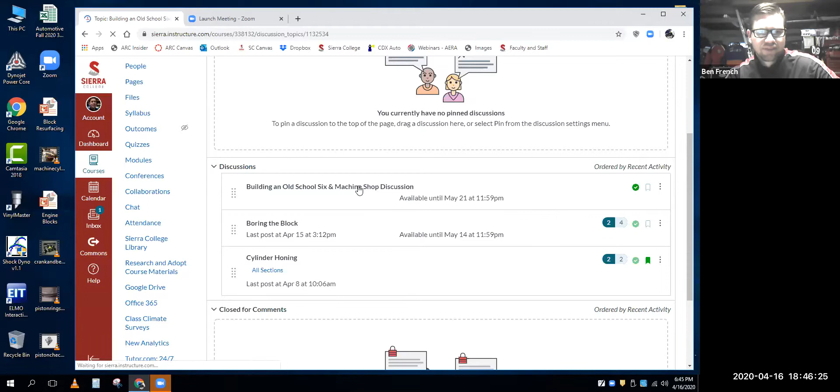Alright, so I'm at our Canvas page, and what's new is I've added a discussion here on building an old school six engine.

Engine power. So there's two pretty decent engine shows. There's Engine Masters, however most of those episodes you need Motor Trend on demand for. Engine Power is okay, there's a little bit more sales-pitchy stuff going on there, but I cherry-picked this one because it's a nice view of the machine shop that the hosts used to work at, and they do some good assembly and some good machine work.

So I put together a little discussion related to this episode. There's definitely some nuggets of information we can pick out there. So that is new on our Canvas site.

Also, if we go to the modules, let's see, here it is. I've added some information there, again links to that discussion. I also have bearing catalogs for regular automotive and for performance, and we have some other things related to piston rings.

And we'll do another series of discussions on episodes related to building an in-house power mouse, which is a small block Chevy often called a mouse motor, because when the big block Chevy came out they decided to call that the rat motor, so the small block became a mouse. Anyways, it goes through pretty good assembly, so it's a good video to look at for engine reassembly, and it's fun to see what they're tuning on their dyno.

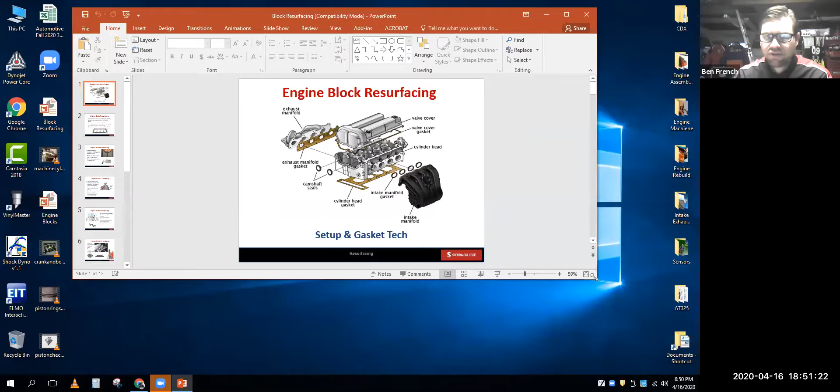So with that, what I'm going to do is minimize this and open up this presentation on resurfacing, and we'll go through this real quick. Surfacing is one where I don't have a real detailed video on it, just some quick videos. They resurfaced the engine block on that engine power show, but it's pretty quick. So I put this presentation together to get into the nitty-gritty related to using the surfacer. I know you guys have used that surfacer when you did your cylinder heads, but I wanted to cover some bases with it as well. So let's jump into this thing.

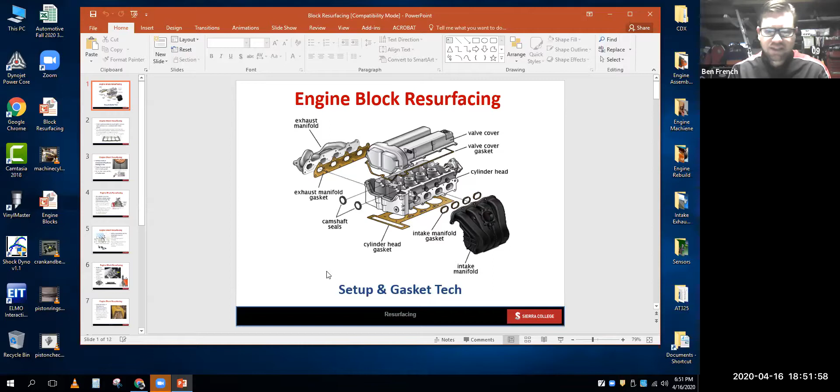Today's engine blocks are running a lot of different metals. We're using thin wall castings, whether cast iron, aluminum, or aluminum and cast iron. Those have different expansion rates. So it's a tough job that the head gasket has to do to get these things, to get the head and block to seal up and act as one unit.

With that, the new standard in gasket design is what they call MLS gaskets, or multi-layered steel gaskets, and we'll get into some of the details of those. Obviously, the gasket surface can't have a lot of warpage. The normal rule is you can withstand up to about 1 thousandth per cylinder bore, but you don't want more than 1.5 thousandths in any one spot. That means at max, if you had a gentle slope going across the bore, you could have 4 thousandths total, but you wouldn't want too much in any one spot.

In addition, the surface needs to be smooth enough to provide some movement related to thermal expansion, but it also has to provide enough bite for gasket retention. So it's got a tough job there. If it's too rough, the head gasket's going to fail, and they like to fail between cylinders, between coolant passages, sometimes between oil passages, and can cause us all kinds of grief.

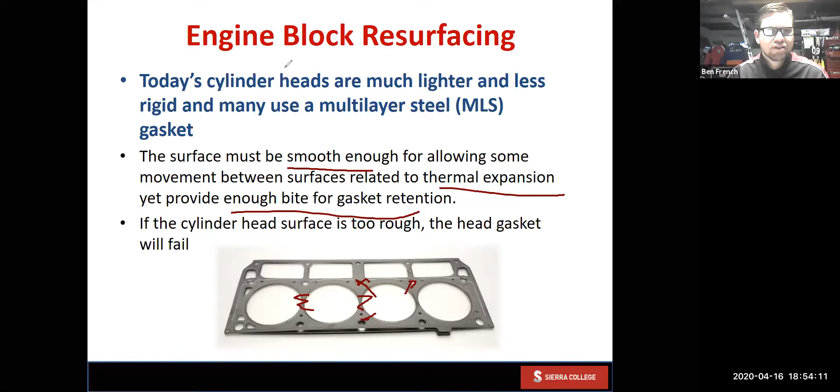So let's keep going here. Clear those out.

So our surface finish on our cylinder blocks and heads, oftentimes you'll hear a gasket manufacturer speaking about RA, or roughness average. We actually talked about that a little bit when discussing cylinder surface finishes. In this slide, we have a 30 RA, or roughness average, and a 60 roughness average. Of course, the proper RA gives you the right surface, the right compromise between bite and smoothness. Now, we looked at this a couple weeks ago as well.

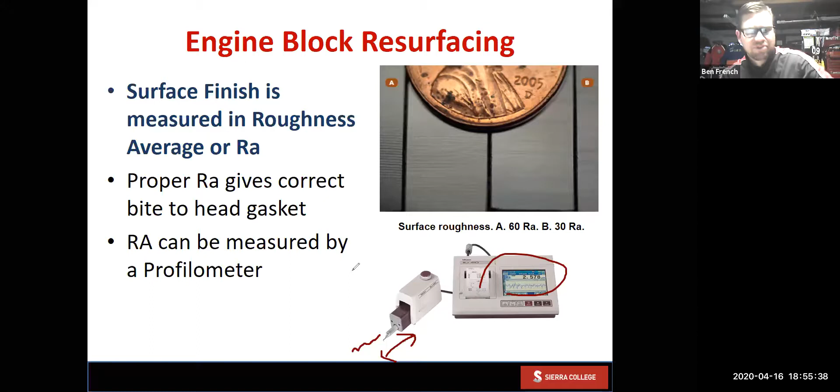This is a profilometer, a nice top-line Mitutoyo model. That guy is around $7,000 to $8,000. It has a little stylus that moves back and forth across the surface, feels what the surface value is, and gives you this readout to let you know what your roughness average is. In high-end shops those are getting more and more popular. They sell a low-end model somewhere around $2,000 to $3,000. Yeah, that's the screaming deal, right?

Okay, so we know the engine block should be fixed in our surface machine, and most surface machines are going to try to index that block off the main bearings, and we want to try to make everything nice and level and parallel as much as we can. If the machine is set up right and the main bearings are straight, this should make the deck surface parallel to the main surface. So most of the time, you're going to want to take care of the mains first and make sure those are straight before you use the boring bar, or in this case, before you use the resurfacer, because we are indexing the deck surface off of the mains.

Like it says here, if any surfaces aren't perfectly flat, we're going to have failure. Oftentimes where I see people have repeated head gasket failures is just improper assembly. They don't get stuff surfaced like it should be, and they end up with surfaces that aren't flat, or they don't follow the torque sequences, or they don't replace their fasteners like they should, or they don't do the right procedure, and then they wonder why it fails again.

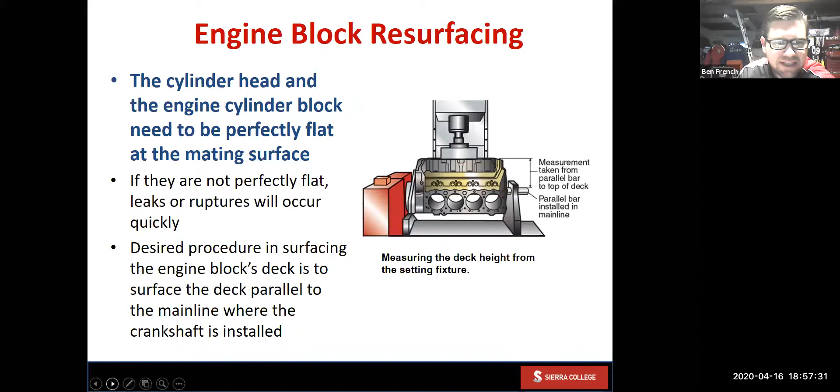So it's one of those things where even in production engines today, even if you haven't increased the power substantially, everything is pushed pretty far to the edge of its normal capacity. So even in a stock application, following those procedures is really critical.

If we were throwing a block on the resurfacer, one of the things we need to remember to do is take the dowel pins out. It seems like that would be common sense, but I've had lots of people forget to pull these dowel pins.

And then it chunks into the machine and creates all kinds of havoc. Now, ones like this one come out pretty easily with pliers, but the smaller ones, you often have to use a dowel pin removal tool to get those things out of there, and they can be a real pain.

Now, if it's an open deck, meaning these holes are not blind, like this, you can look at this hole here, and that goes down into the water jacket passage, right? So imagine it didn't have this type of a dowel, but it had one of the small dowels that was pressed in here. And if I couldn't get it out, and this tool kept slipping off, I could just use a punch and hammer it through and then pick it out with a magnet out of one of the water jacket passages.

So that's an option that I see people fight with this tool and forget that, hey, if it's an open surface, I can hammer it through there.

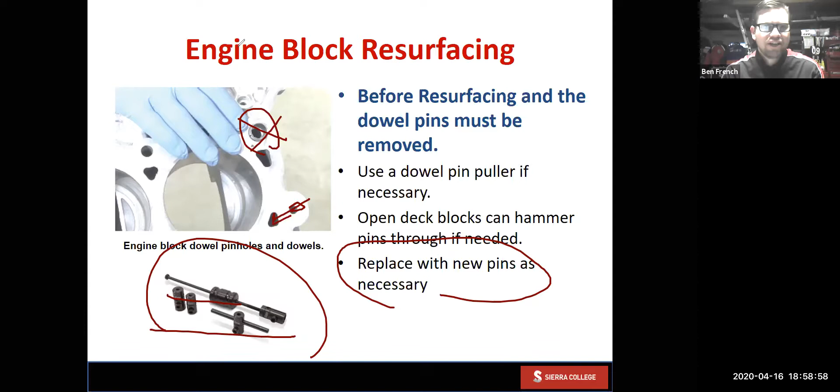Obviously, you want to replace these pins, these dowels, whenever possible. Even with this style up here, oftentimes you'll end up knurling them up pretty bad pulling them out, even with some pliers, and you'll want to end up replacing those.

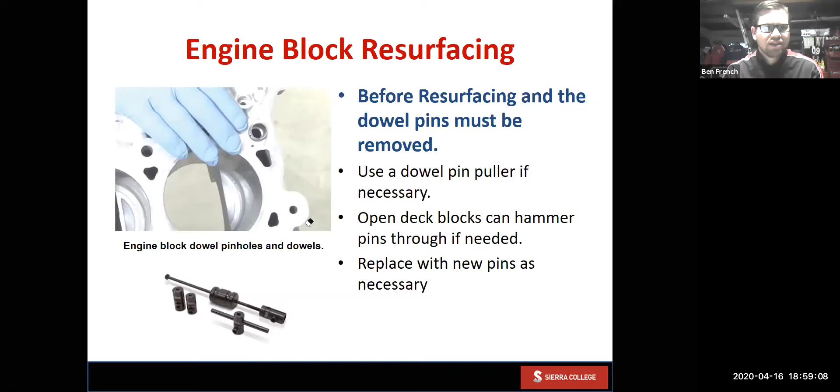All right, moving right along. So then your next step is to get that cylinder head or that engine block all squared up and level to the cutter as much as you can. And if it's not going to be level, you need to make sure that it's not level because it's not square to the mains, or that you haven't just set up the machining correctly.

At Sierra College, we often use machinist levels. Of course, those work a heck of a lot better if the surfacer itself is level, but you can compensate if the surfacer is off by a little bit. You just want to make sure that the head surface here matches this surface there, right?

Now, the nice thing about these surfacers that index off the mains is that it allows you to rotate the engine block from side to side and cut both deck surfaces the same height, so that this block deck height is the same on both sides. And that's critical, right? Because if this side was cut lower than the other side, I would have higher compression on this side of the engine than I would have on that side. So if you use the machine correctly, you should end up with the same deck height on both sides.

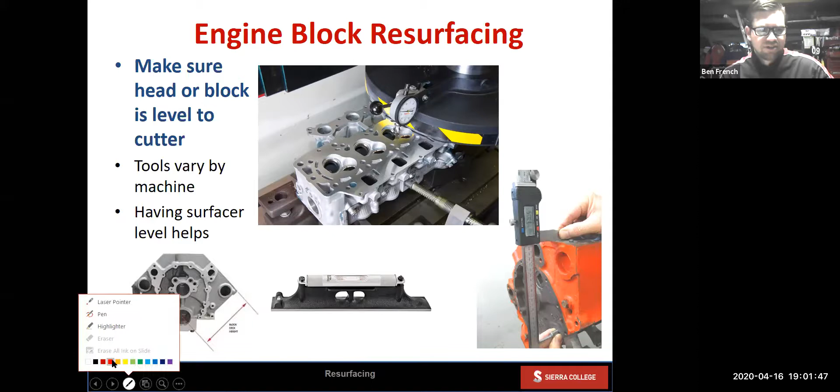All right, different styles of machines. At Sierra College, we have both wet grinder styles, and we also have cutters. The nice thing about a grinding style machine is they work well for aluminum or cast iron. They do tend to make a little bit more of a mess, but in years past, if you were going to handle aluminum, that's what you had to use.

Slower material removal. And of course, as I'm cutting this surface off, I experience stone wear, and these stones are not cheap. Those stones can be anywhere from $500 to maybe $1,000. So they're definitely not cheap.

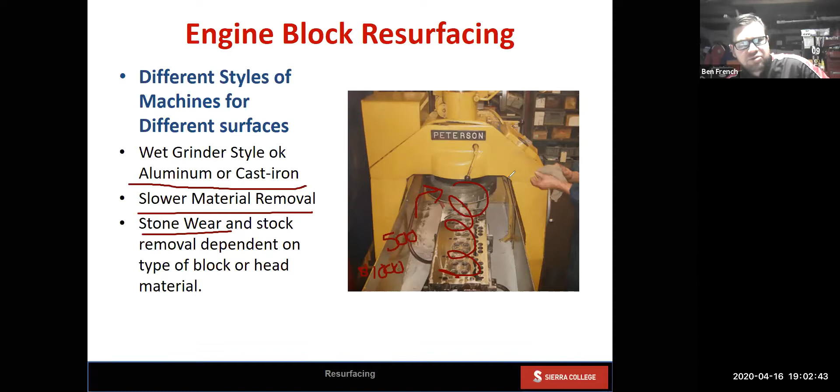And then as they wear down, they don't wear too much with aluminum, but for cast iron, if I moved the machine down 2 thousandths, it would really only probably take 1 thousandths off of that head or that block, because I have the same amount of stone wear occurring, right? So stone material is sloughing off the cutting stone as I am working my heads.

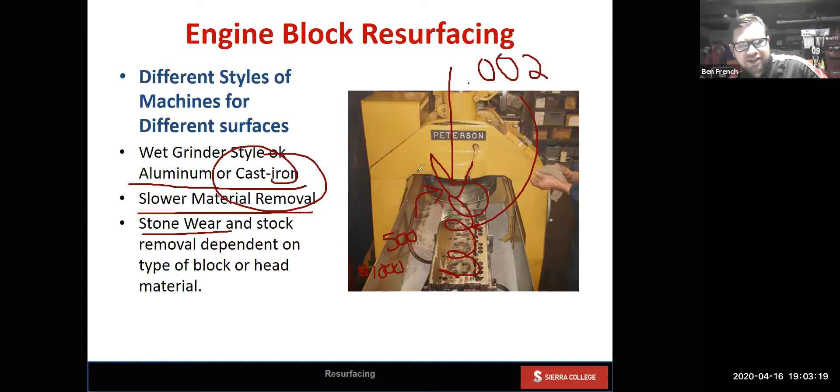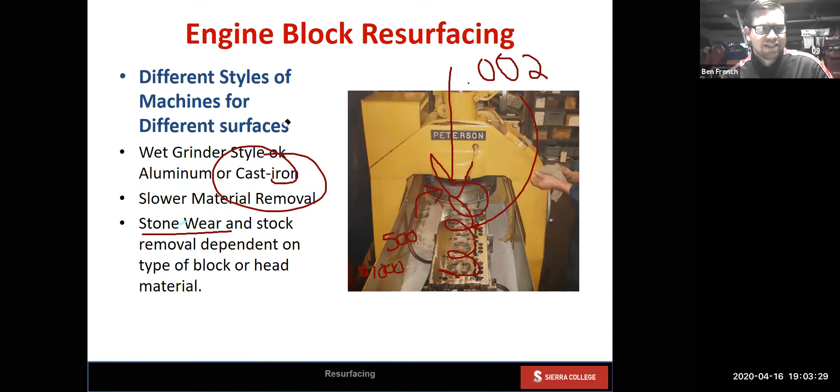And then of course, anytime I dress the stone, I'm taking material away. If I'm doing just a bunch of aluminum, I do need to dress the stone to keep it clean periodically. If you do a mix of aluminum and cast iron, usually doing a cast iron block or head will dress up the stone good enough that in between aluminums, you end up not having to dress the stone so often.

But they don't take as much material away. They tend to make a bigger mess, and you have to pay attention to what you're actually removing, because you are going to have some stone wear. So if your feed says you've taken off, let's say, 10 thousandths, well you probably haven't really taken off 10 thousandths. So you'd want to set up a dial indicator or some type of depth gauge on a spot in your combustion chamber to check your work, to really see what you were doing if you were doing a high-end build.

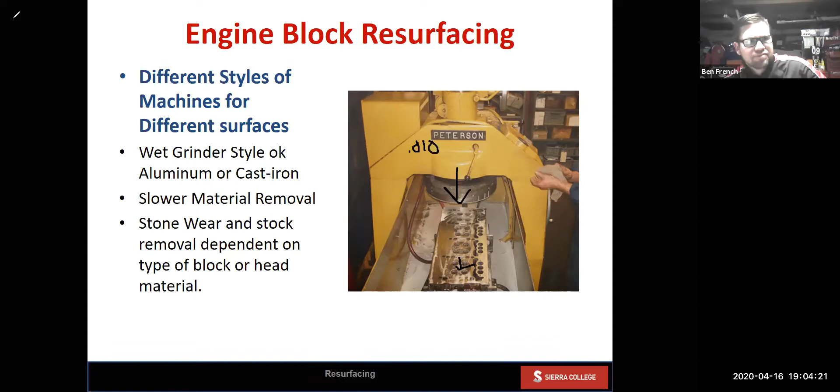All right, so our other style of machines would be the dry cutting machine, right? And of course, we have our old Storm Vulcan in the shop. And of course, the older machines, the cutting bits on them were really only set up to deal with cast iron. The speed that the machine was set to, its feed rate, and these bits were really set up to cut cast iron and could not handle aluminum.

However, the new machines have different carbide cutters on them. They can operate at variable speeds, both for the speed of the cutting head and the speed that it sweeps across the block. And because of that, these machines, a lot of them are computer controlled, and they're becoming kind of the industry standard. They give you more flexibility as far as setting things up, and can cut faster. They can definitely cut faster than a grinding wet machine, and they make less mess, but they are pretty darn expensive. So anyways, that's kind of the new standard.

Our old dry cutting machine works great for cast iron, wouldn't work good for aluminum. So Phil, like your Subaru engine, if you needed to do surface work on that, we would have to use the other machine.

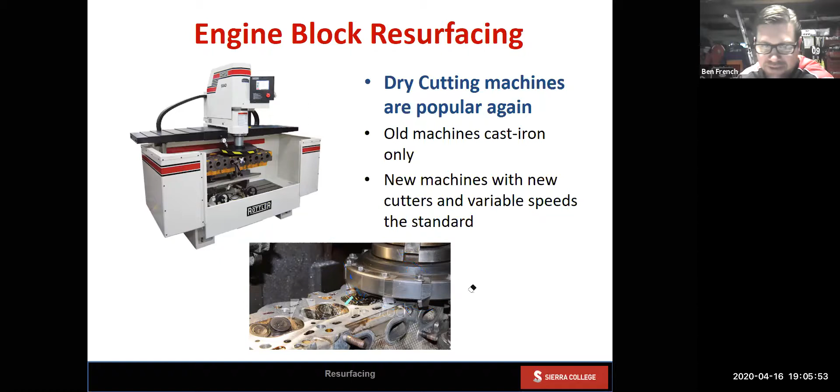Mm-hmm. Yep. All right, so now we're gonna finish this thing up with a little bit of gasket tech.

So, I'm a big proponent of, hey, if you get something, any parts you get, and if they come in a box with a little thing of instructions, read the instructions, right? They'll give you some good tips on how to set that thing up. All the time in my career as a mechanic, something would happen and they'd go, well how'd you know how to do that? And I'd say, well, I read the instructions in the box. Okay, so maybe you do that when people aren't looking so they don't give you a hard time, but you can learn a lot by reading the darn instructions. So they'll say, hey, don't use these sealers on there.

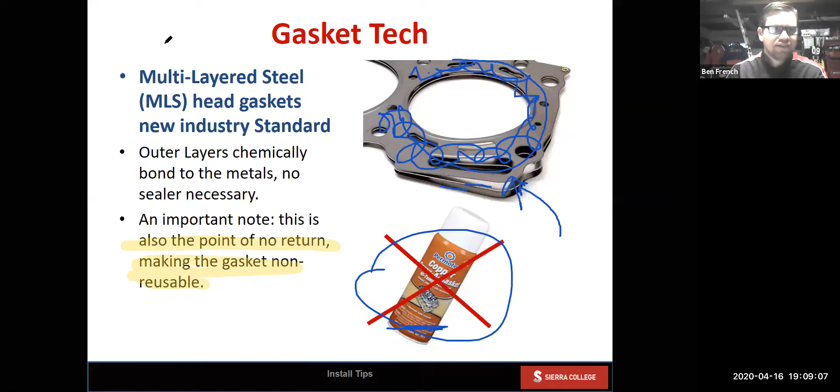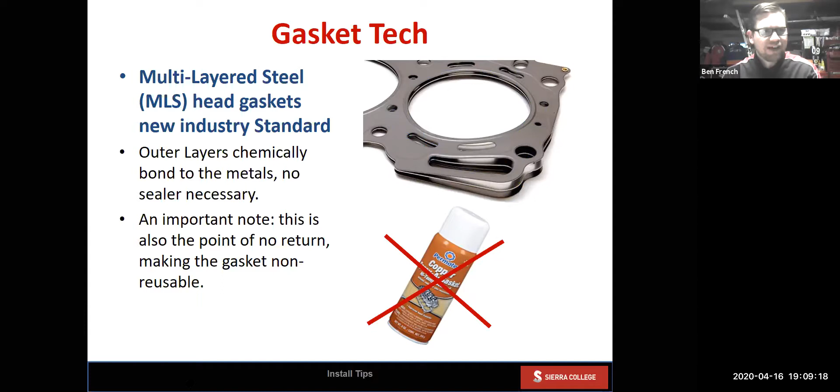So, couple of things. I've seen both of those mistakes happen from multiple people, and I've had students trying to reuse these gaskets. Like I said, it might work for a while, but it's not really made to work permanently like that. Again, the surface finish is really important.

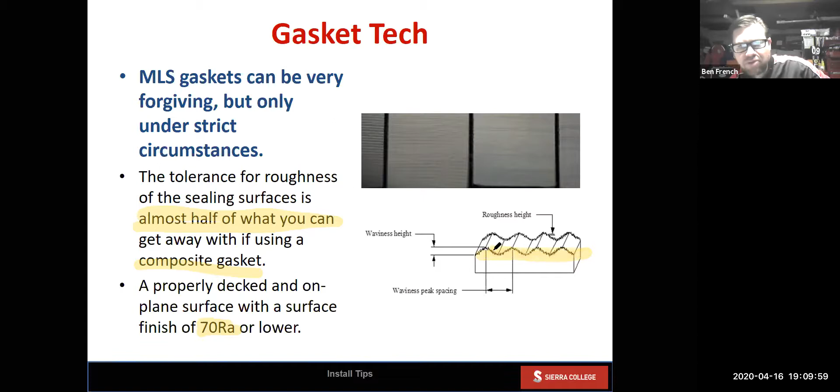What are we talking about? Well, typically these guys want a much smoother surface finish. So what we're saying is pretty much about half of what you could get away with a conventional composite, like a good quality Permatorque composite gasket. So what does that mean? 70 or lower, and some might be 30 or 40, but 70 or lower gets you in the right roughness average ballpark. So this one's just barely in the ballpark. This one's definitely the smoothness here that we would want for our MLS gaskets.

So they want a smoother surface. They do tend to be able to withstand a little bit more warpage though. Like if the surface isn't quite as flat, it seems like you can get away with that as long as the surface is nice and smooth.

So this tends to be one where if you're doing a head gasket job in the field and you can't take it to the machine shop, it's close but it's not perfect. Maybe you're right on the edge where you've got that 1.5 thousandths of surface imperfection, a little bit of a dip in the surface or something. If you can go over this with some fine sandpaper with the deck surface sprayed down with some WD-40, so you're kind of doing a wet sand and can get a real smooth surface, this type of gasket will work good in that type of situation.

Again, proper torque sequence, all that other stuff comes into play, but they tend to be a little bit more forgiving than a solid gasket because it has those multiple layers.

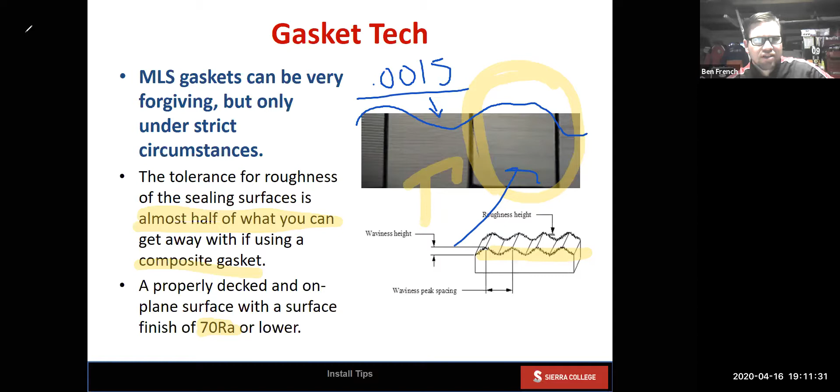All right, thickness. You can get these in all kinds of thicknesses, and they seal pretty well. In fact, they're generally available in a wider thickness range than what you had available to you with conventional gaskets. So here we have 27 to 140, that's a figure from Cometic gaskets. Others are real similar. That being said, you could go to something thicker and take yourself down a notch on compression for your compression ratio. But if you're having to do big swings, you probably need to make other changes, right? Like maybe put in a dish piston or something like that. So pretty good range on these.

And other notes related to that would be, if you're changing the head gasket thickness, push rod length becomes a big deal. Of course, if it's a V-type engine, is the intake manifold going to line up properly as it sits down in that valley? So those are things to think about.

Lastly, you can't stress enough that, hey, good quality fasteners is a big deal, right? The combustion process is trying to blow the cylinder head right off the deck surface of the block.

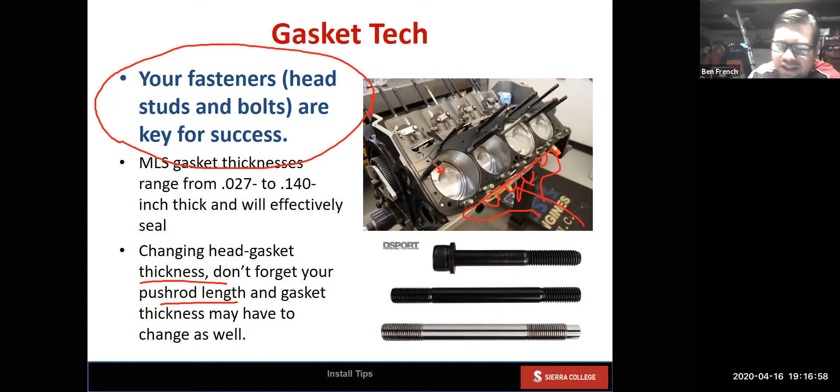Speaking about things not lining up, if you ever have an issue like that - like the other day I was trying to put some exhaust manifolds on an engine, I'm drawing an exhaust manifold here - and stuff's not lining up, you've got to stop and ask yourself why. A lot of times you might pull something apart and it came apart just fine, but when you relieve the tension, that component was warped, and now you're putting it back on warped. So check for straightness, not only on cylinder heads and deck surfaces, but things like your intake manifold and exhaust manifold especially, because those like to warp and then parts won't go together correctly.

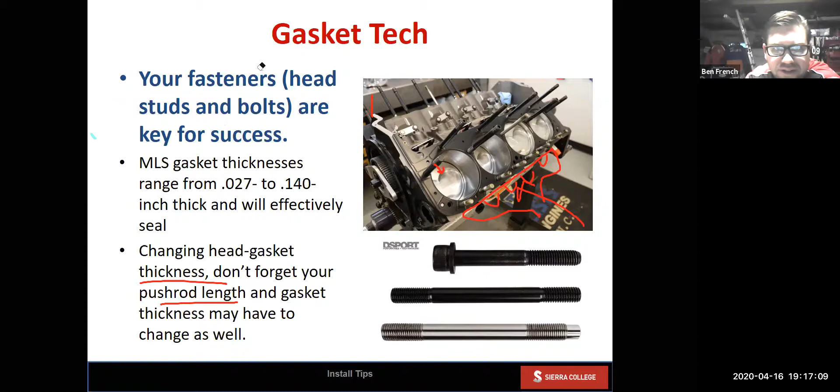Just keep in mind that having stuff level, having stuff straight, is the key to proper assembly there. So with that, we finished up our gasket tips and tricks.

Phil, do you have any questions or concerns? Brian, do you guys have any questions? I don't know, no. All right, well, pretty straightforward. Yeah, it's a pretty straightforward deal. What I find is just a lot of folks don't take the time to make sure they have quality fasteners or that stuff is straight or things like that.

Speaking of fasteners, I don't know if I've done my thread wedge analogy with you guys, but I think I will share that with you.

Let's see if I can make... let's see, give me a second here... whiteboard... and I want to make video. Let's see. Optimize screen for sharing video clip. All right. So now you can see me a little bit bigger here. I'll do my... actually, I'm losing it, guys. I can just use my document camera. I got too much technology here, it's throwing me off. Document camera, there we go.

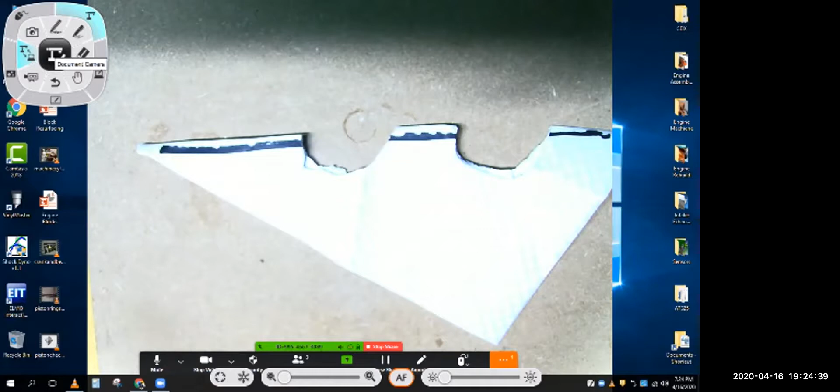Now we'll do this real quick, just because I feel, here was my thread wedge, okay, yeah, that didn't work out. So you can see I ripped it up there, but if I roll this sucker back up, you can see where it starts to form some threads. Of course, now they're going to look a little bit uglier, but here we go, right? So you get the idea. So threads actually wedge parts together, and that's what gives you the clamping force.

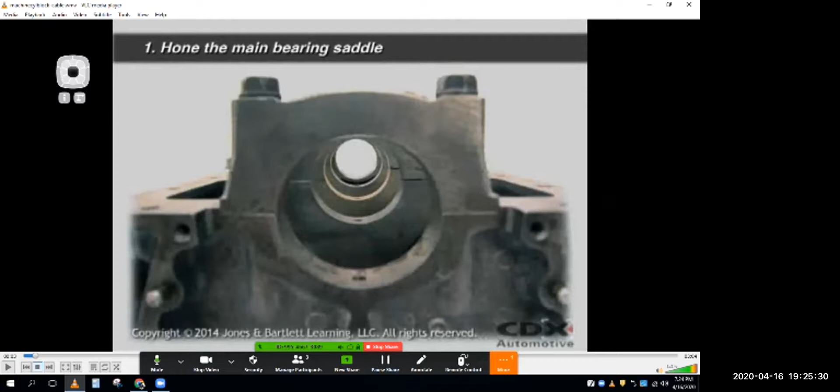All right, okay, so we got that. So now I will turn it back to the computer. So you should see my computer screen, correct? Yep. And we'll see if we can get it back on the video. The main caps need to be removed first. There we go, yeah, they're starting with the line honing operation. So we'll get to that part. All right, here we go.

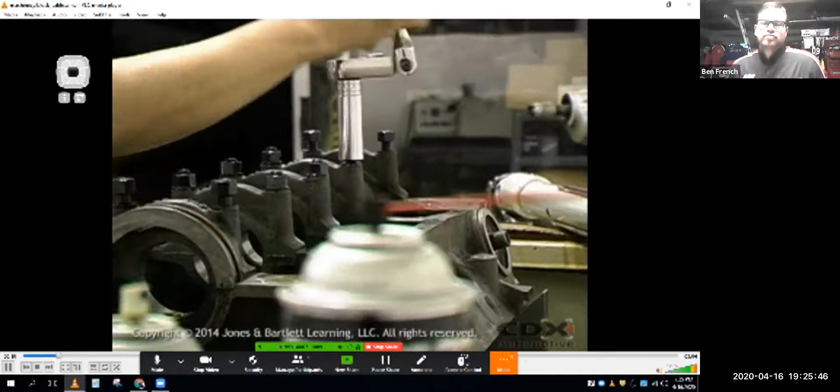The whole thing is only 3 minutes long, so they rip through it pretty fast. Caps are put back on the block and tightened and torqued to spec. Now the opening is no longer circular, it's a slight oval. The size is checked with a dial bore gauge, and the honing stones are inserted and expanded until the proper drag is felt.

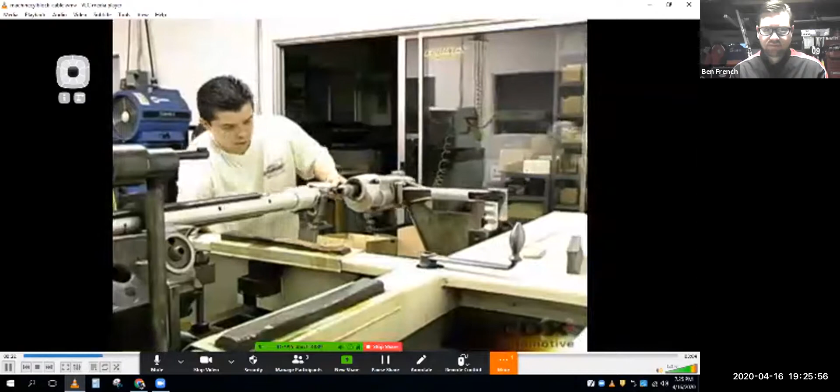The honing drill is lined up with the stones, and once the oil starts to flow through the tube above the block, the stones are passed in and out while the drill is running, so that metal is removed and the oval shape begins to return to a perfect circle.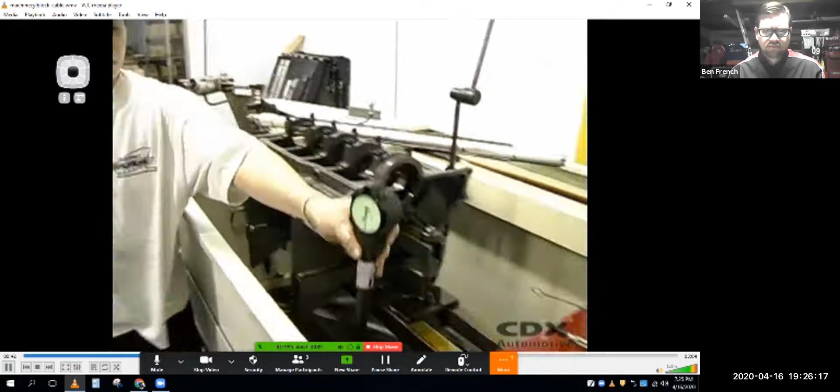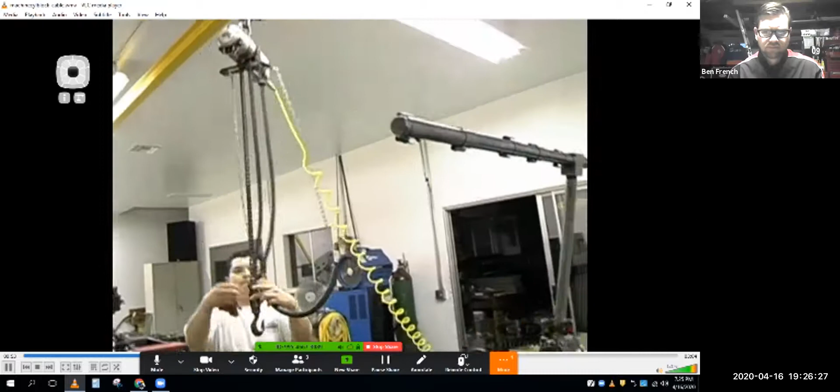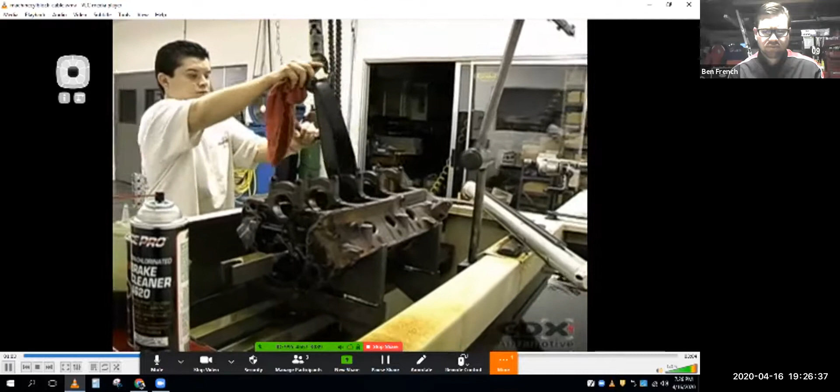As the stones take off metal, the block and caps begin to heat up, and the machinist checks the size with a gauge and takes a break to let the block sit and cool so the metal will return to its true size. After a few minutes of cooling, the stones are run again and progress is checked with a gauge. Then the block is lifted and turned around so the hone can be finalized to the perfect size from the other side. This is the first process for the block because the next two machining procedures depend on a perfectly straight line through the main bearing bore for proper mounting to the machine.

So I guess I'll pause it right there. One thing about this video is that you can tell the producers didn't really know about machine work, so their script is a little bit generic.

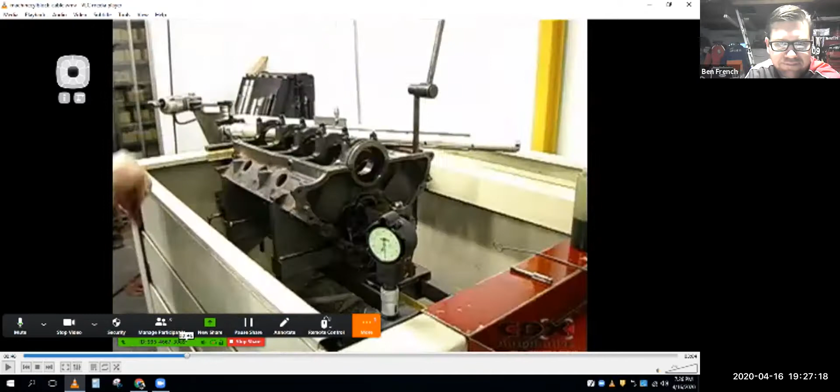Every machinist has a little bit of style to what they do, right? So this guy, for whatever reason, liked to spin the block around. I don't know if you necessarily need to do that, but we do know that when you're line honing...

It always cuts more from the end that's closest to the drill, right? So if he was having a hard time removing material from this main right here, which should cut the slowest because it's the widest—it's the thrust bearing on this small block Chevy—normally I would have put that thing on this side to make sure it cuts at a decent rate.

So why would you flip it? Well, this character might just flip it because that's his style of how he likes to do it. Ultimately, if he ends up with the right housing bore size, it doesn't really matter, I guess. Normally you'd flip it if you didn't have bores cutting how you wanted, or if you wanted to more aggressively cut one side than the other—maybe when cutting the caps, you cut more material on one side. Something like that would encourage you to flip it around to try to get things even when you were done.

So I do like how they go from this and say, hey, now that we've got the main bearings in alignment, now we're going to resurface it. And of course, he gets the easiest dowel pins to pull out of there. Usually only like 3 times out of 10 will you be able to pull it out with some snips like that—you usually have to use the dowel pin removal tool or hammer it through or something else. So with that, I'll turn the announcer back on and we'll see what they have to say.

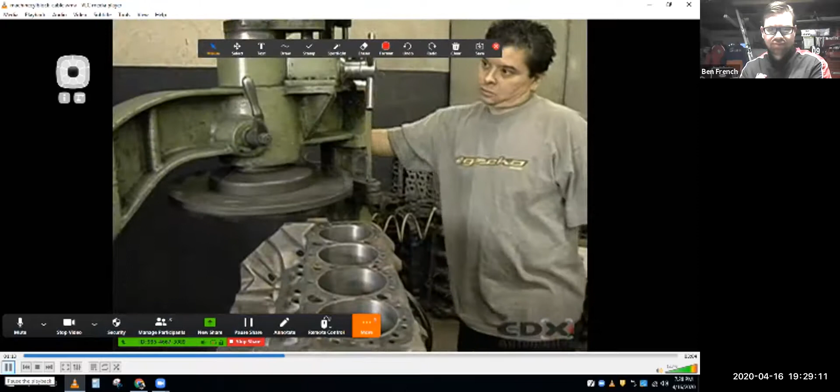For proper mounting to the machine, next the alignment dowels for the heads are removed, and the block deck is leveled. When the deck is perfectly level, the cutting machine is started and runs by itself at a set pace, shaving the surface to make the deck perfectly flat so the new head gaskets will have no problems sealing out water, air, or oil leaks.

When one deck is done, the block is rotated and the machine is set up again. Both decks must be cut the same amount or there will be a difference in the compression ratio from one side of the motor to the other, and the amount removed in this case was so tiny that the factory number stamping of the block ID was even still visible.

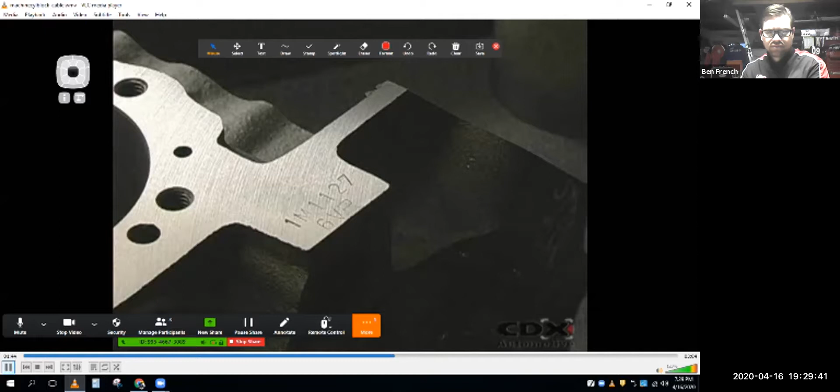Using the same mounting point through the main bearing bore, the block deck is now leveled in the boring machine. The machine needs to be set in the approximate center line of the first cylinder bore. Then the machinist tells the machine what type of engine this is and presses go. The machine takes care of the rest for the first half of the block.

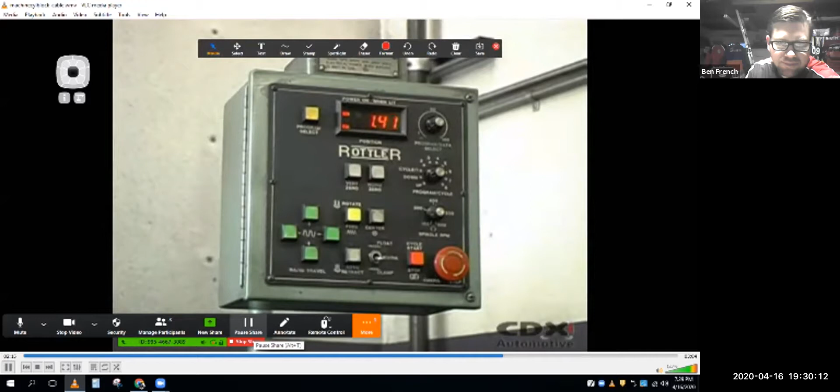This particular machine centers itself in the bore, and the cutting tool for the proper overbore size, already set up in the spindle, goes to work once it starts to spin. The boring machine knows how far to go down in the bore for each engine type programmed into it. When done, it retracts the spindle and automatically moves to the next bore and centers itself once again.

It goes. So that's a pretty darn neat boring bar, right? That's a newer version of the machine we have that has computer controls on it. That one's probably from the 90s.

You still had to either program the start and stop so it knew how long the bores were. You either had to program that in manually, or some of these machines in this era had program cards you could load in.

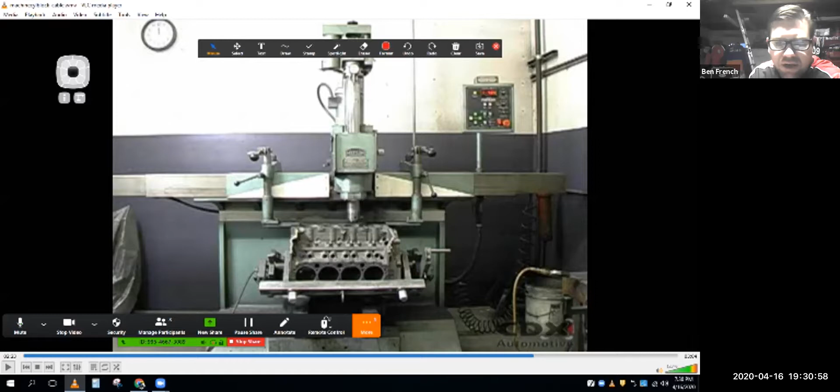But that makes it pretty nice, and it can go from one bore to the next. One of the boring bars we have in the shop is supposed to be able to go from one bore to the next. I haven't been able to get it to do it correctly yet, because it's a little bit older than this machine, so it's almost electromechanical. You have to manually put mechanical stops in there, but once you do that, it's supposed to be semi-automated and go from one to the next.

The surfacer they used is the exact same surfacer we have, that Storm Vulcan. The surface finish or roughness average this provides, I don't believe is smooth enough for MLS gaskets. It's just a little bit on the edge. So a good composite gasket would be a better choice for a block or head surfaced with this machine. It comes down to the type of teeth on it and how quickly it moves across the surface of the block.

All right, we'll get that boring bar set back up.

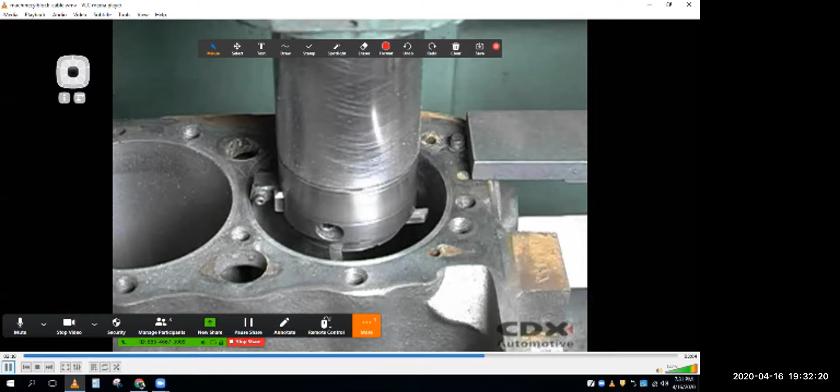The machinist tells the machine what type of engine this is and presses go. The machine takes care of the rest for the first half of the block. This particular machine centers itself in the bore, and the cutting tool for the proper overbore size, already set up in the spindle, goes to work once it starts to spin. The boring machine knows how far to go down in the bore for each engine type programmed into it. When one bore is done, it retracts the spindle and automatically moves to the next bore and centers itself once again. It goes through and cuts all 4 bores to size for this side of the block.

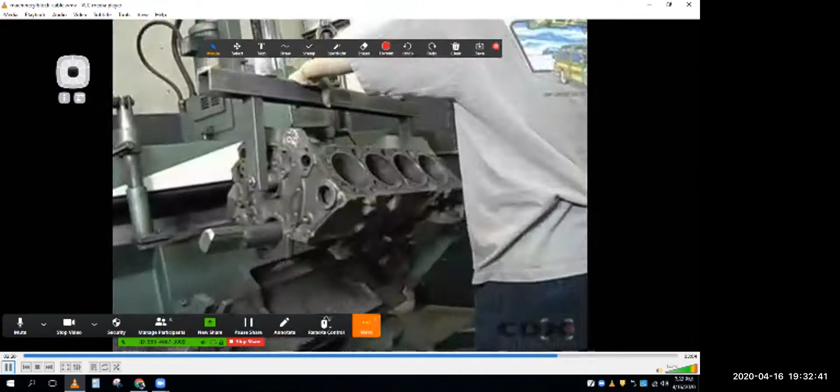The block is then lifted out and flipped to the other side to get finished.

A piston bore that is still the original diameter as when it left the factory is said to be standard size. Pistons are manufactured for oversized bores in increments of 10, 20, 30, 40, and 60 thousandths of an inch, or in increments of 0.25, a quarter millimeter, up to 1.5 millimeters. The boring machine will cut the cylinder wall to fractionally less than whatever bore you need. The honing machine will later expand it to the exact specification.

All right, so that was pretty decent there, right? We got to see that machine in operation.

The newest machines tend to not only bore all the cylinders, but a lot of the new machines are almost like a CNC station. So that same machine could not only bore all the cylinders, but resurface the deck surface all in one operation. You could program in the blueprints, and in theory it could center the bores to exactly the blueprint specification.

There's a machine shop in town off of Fair Oaks, I'm trying to think what it's called, I think it's called Motor Machine. Anyways, they have one of those machines, and what they've told me is...

I'll convert it to an Adobe document for you, and we'll keep plugging away. So next week we'll get into balancing, and then we'll shift gears and go to assembly. I'm going to put a couple more fun videos for you guys to check out that will aid our discussion.

And our hope is to get back in the shop and finish things up. I think I'll push for them to give us 3 days of shop time. But no matter what, if you guys plug along with me and continue on the stuff, I'll make sure that you guys get your grades out of this class. So at least you get credit for doing something in it.

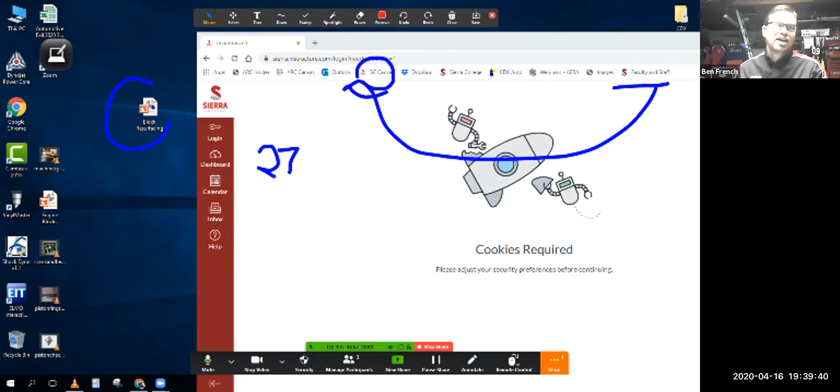I can tell you, I got insight because I have both colleges, right? So at ARC, they did a whole bunch of different things. I had to move all of our classes to online instruction for summer. We only had a few summer school classes, but ARC is going to be closed down throughout the summer.

Initially in the fall, ARC said that they were going to start the first half of this semester online, and then hopefully get into the shop halfway through the year. But I just had to rework the fall schedule again, because now they're saying that they think we're going to start off like normal in the fall, and then when cold and flu season comes in, they might have to shut down the school again or limit us or something like that. Because when that comes into play, you're not going to be sure who's got the flu and who's got the virus, right?

So it just kind of shows you how much stuff changes each day. So we're still not really sure where we're at. April 27th, like I said, I'm going down there, myself and Jennifer, and we're meeting with the administration and doing a shop tour. And so I'll know more after that.

My plan after that is to try to set up appointments for people that just want to pick up their stuff. Like if you just want to pick up your engine parts and drop off your worksheet, then I can give you a grade. Or if you want to come back and finish your work, I'll try to figure out what days we'll be able to do that.

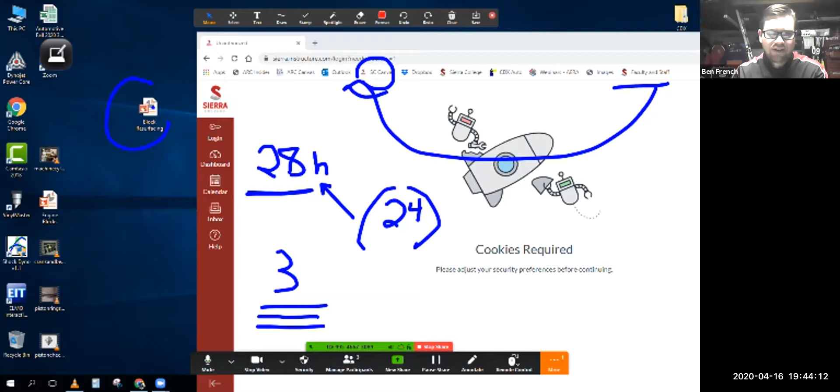I got an email, I'm gonna shoot you just a couple questions that fall into my specific scenario rather than the normal stuff - just things I want to pick your brain on. So no big deal, but I'll fire off an email to you.

It's good to hear your voices and to know you guys are out there. It's just a weird deal, and I'm happy to hear that people are out there and they're safe, and it's kind of fun just to be able to talk about engine stuff.